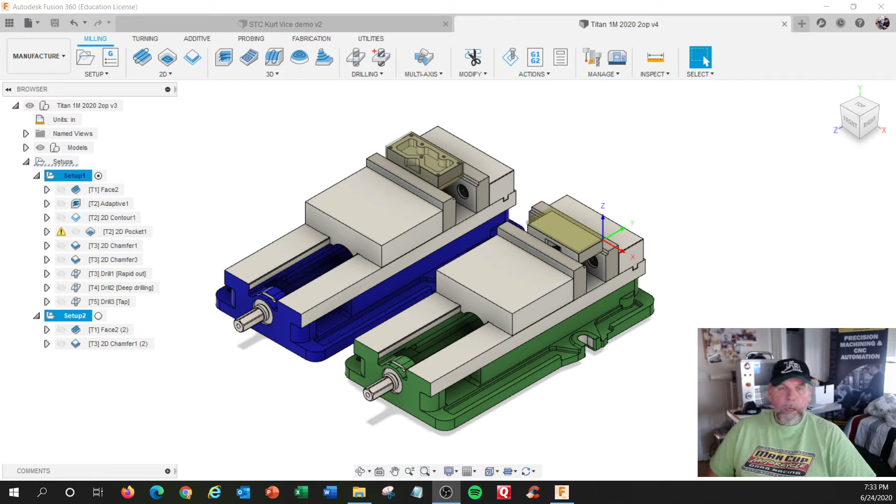So in this setup here, we got 2 vices. I'm going to just turn off here. I got a lot of stuff going on here. Models. Turn off that body on that side. Oh, it's 2 of them.

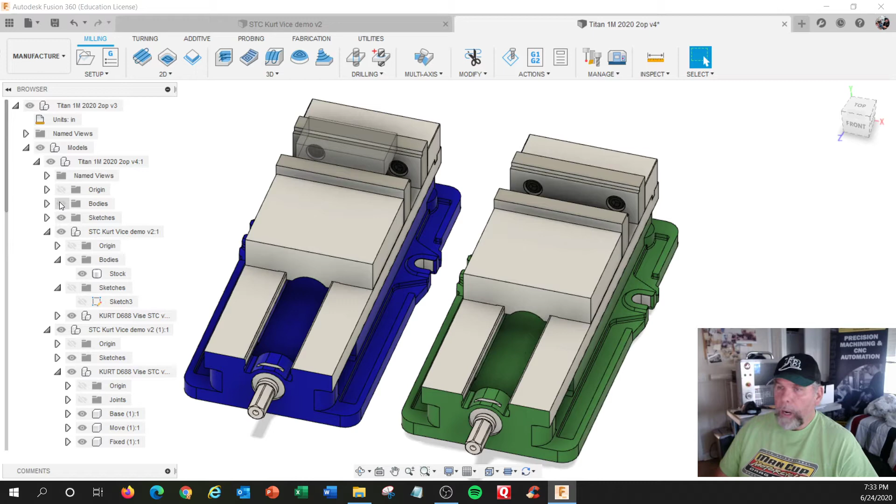All right, on this side we have raw material in our step jaws. These are like soft jaws. We make them out of cold rolled 1018 steel or 6061 aluminum. We pre-machine all these holes. So this is like a good shop project. We buy 1x2 bar. We cut off the length, and we cut this notch in here 200 wide by 200 deep. Works for a lot of stuff.

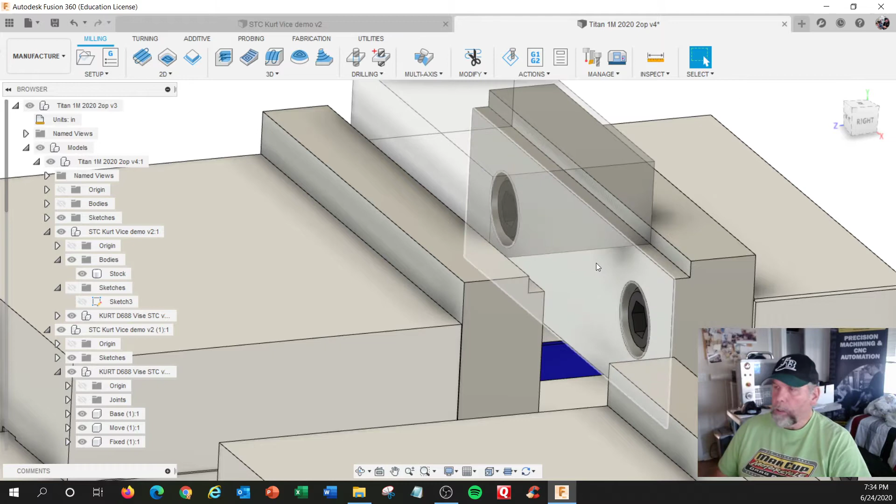You could probably get away with 150 deep or 100 if you try, unless you get those new Mitee-Bite jaws. Okay, so raw material, and we're going to put it in the jaws. We're going to be able to machine all the way around here, and in this case I didn't get time to build one, but we'll put a stop, or you cut a notch in your soft jaw for your location for production machining.

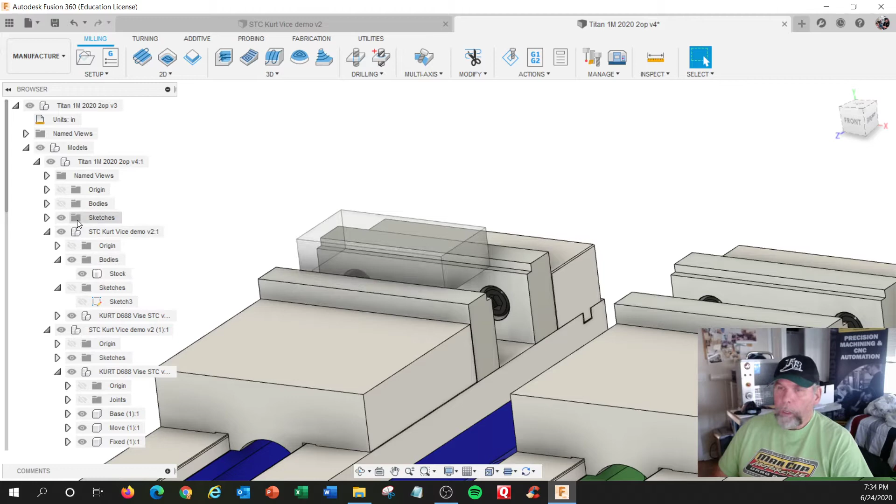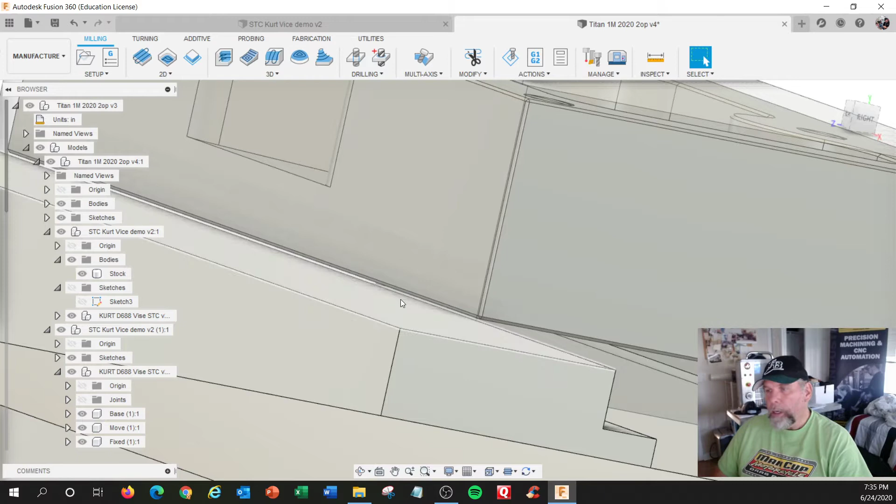Let's turn the model back on. Okay, so inside here is the model, and it's 1-inch material sitting down the 2-inch jaw, and I think I have the stock shifted correctly. I might be a little deep here, but it should clear without hitting the jaw. I might be a little bit off on that, but we'll see. On this side is operation 2, and we'll have extra material, which is on the bottom here on this side.

I'm going to work a little bit better on the simulation, but let me re-zero this. Oh, let me play with my new mouse. Okay. Bring it in a little bit closer.

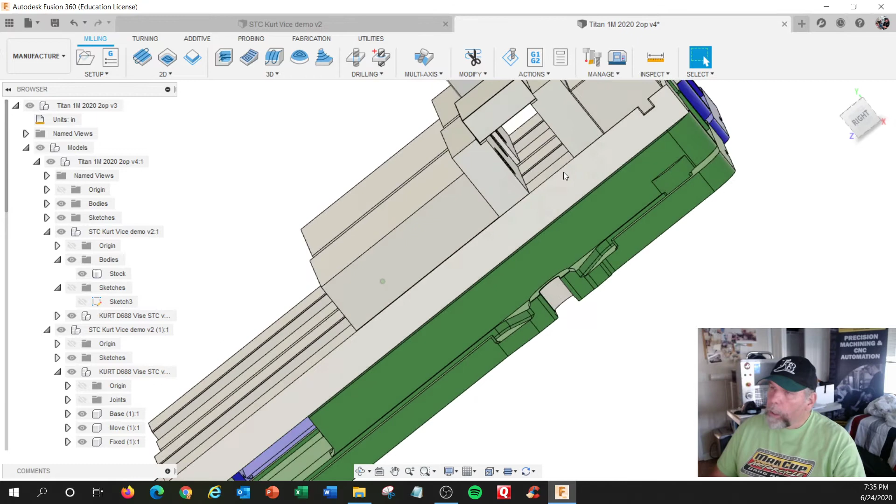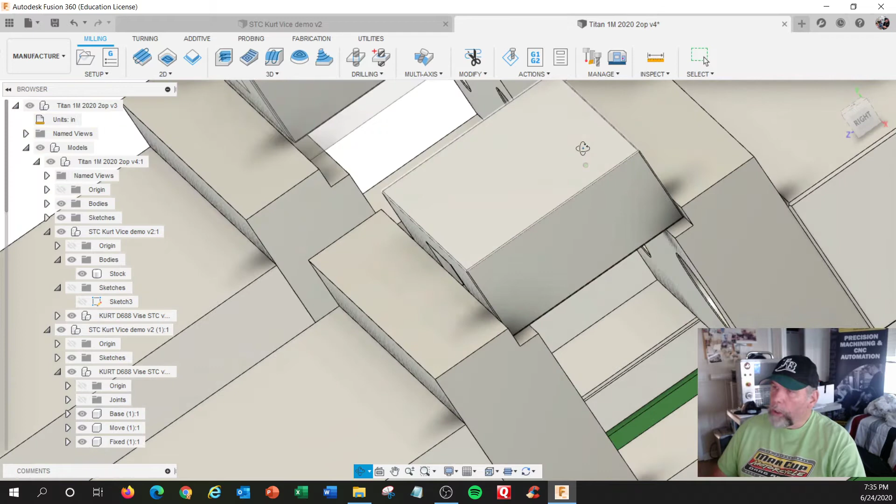So we're going to sit on the finished surface underneath there with the notch towards us, because this is the datum. We're flipping it over so the datum is on this side. So this datum and this datum will align with that. And the goal is we're trying to cut off all the extra material from this side, which will be facing up. And let me see if I can shrink some of these things up.

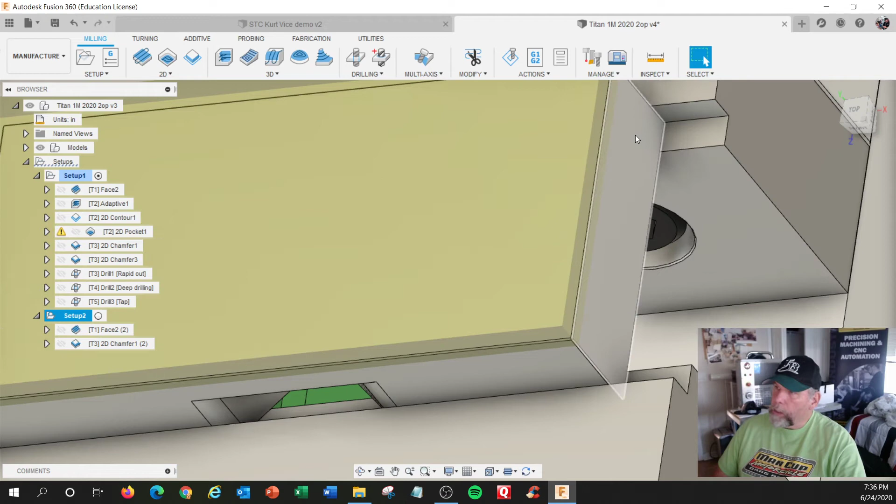So setup 2 would have this, some people call it the hat. That's like the remaining material. And we'll have to put a work stop against this side here. So kind of aligning with the Titan setup procedure to be always aligned to the model. So on this side X, Y, and Z are aligned to the model. Only when you're doing this setup, let me re-zero this.

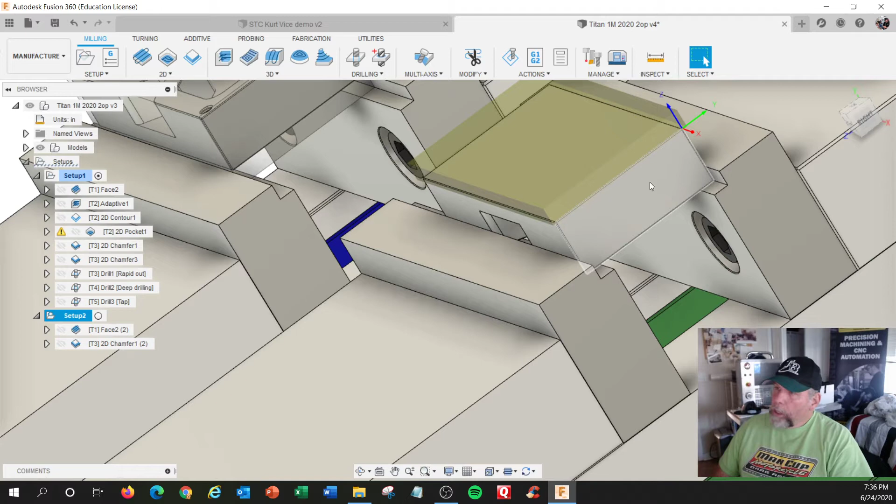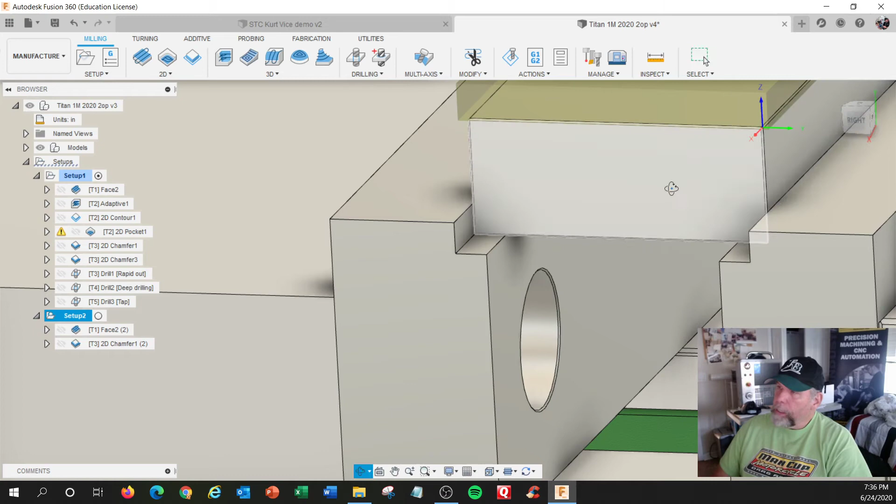You're gonna edge finder probe this side, edge finder probe that side, but you can't really edge find with this chunk of extra material up here. It's overhanging. So we substitute a 1-2-3 block. And then we edge finder probe this side and this side. And then you can either set your tools off of this surface here or the top of the 1-2-3 block, which is about up here somewhere, and then shift it down.

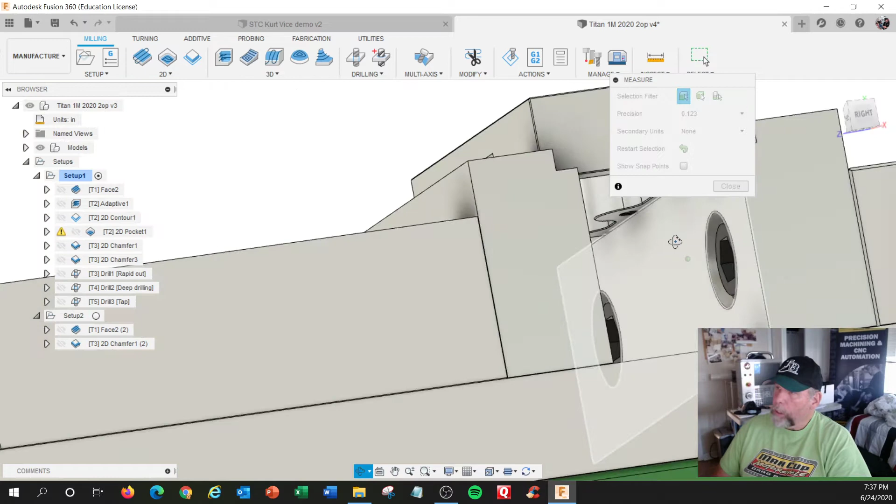If you're using a precision block, and the dimension on this is 750, if I inspect this right now, measure this surface from here to here, and it says right there 750 tall. That's what we're trying to create. So if you're doing a setup like that and you're setting this as your Z0, your setup is Z0, right? You got to chop your way down here.

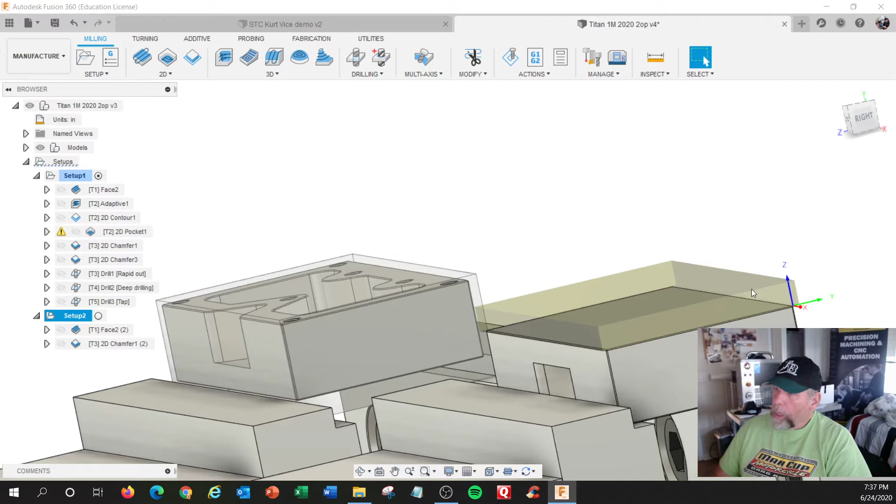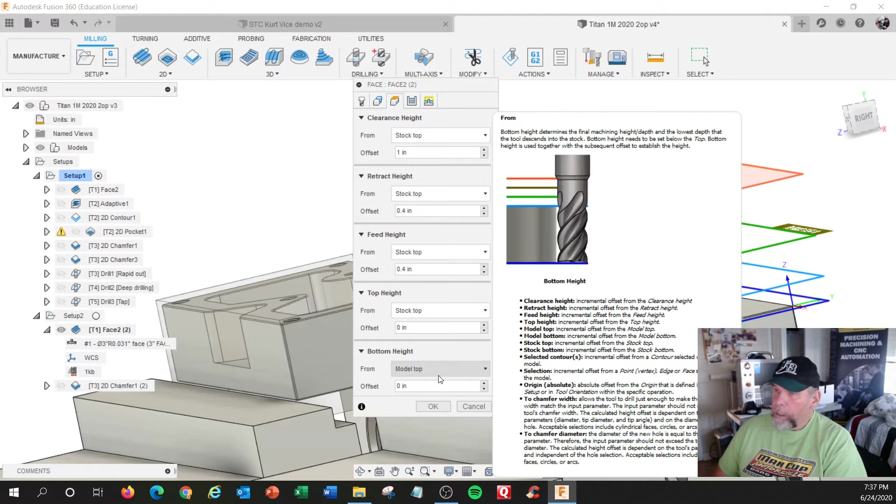So on this side, instead of model top, you go and edit this. Sometimes I use model top and 1 inch, but I would be going stock top. Stock, stock, stock, and the finish line is model top. So you got to know where your stock is, or it's not going to recognize it for roughing.

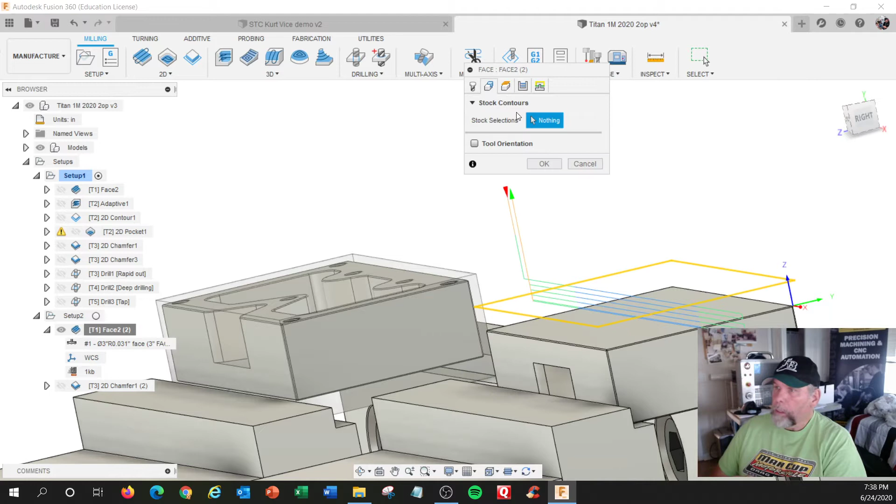And let me go and edit this here. I'm going to do multiple cuts. So we got geometry, heights, and I've decided to just take a nice round number, 50 thousandths cuts. And we're going both ways, starting from left to right or right to left. You can play around with this number. And I might play around with the chip thinning later, but this is pretty much straightforward.

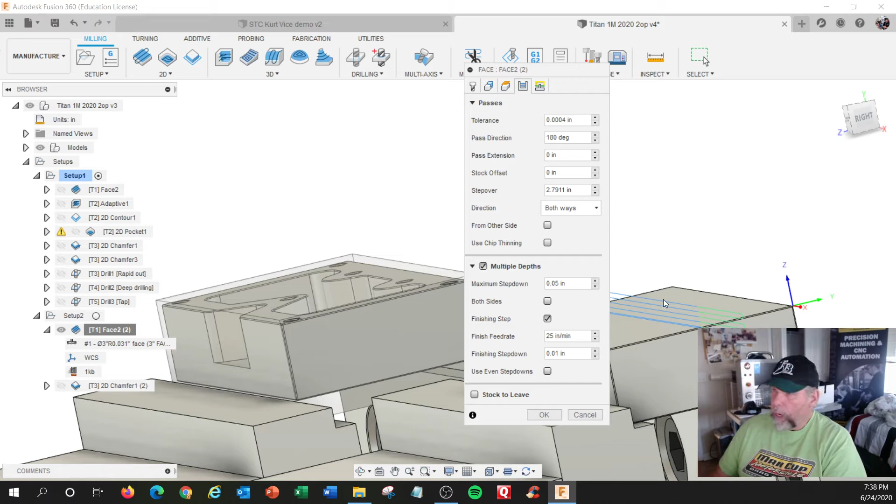And I'm going to do a finishing step that matches the finishing step on this side, so I get exact same finishes on feed rate. And I'm just going to skim 10 thou off, because you could be more aggressive on the rough down, and then when you get to the last cut, we're going to go only 10 thou. We're not going to leave any stock. And I always turn on extend before retract. So if it's not going all the way, you extend before retract, or you'll have to play with some of these numbers. Okay.

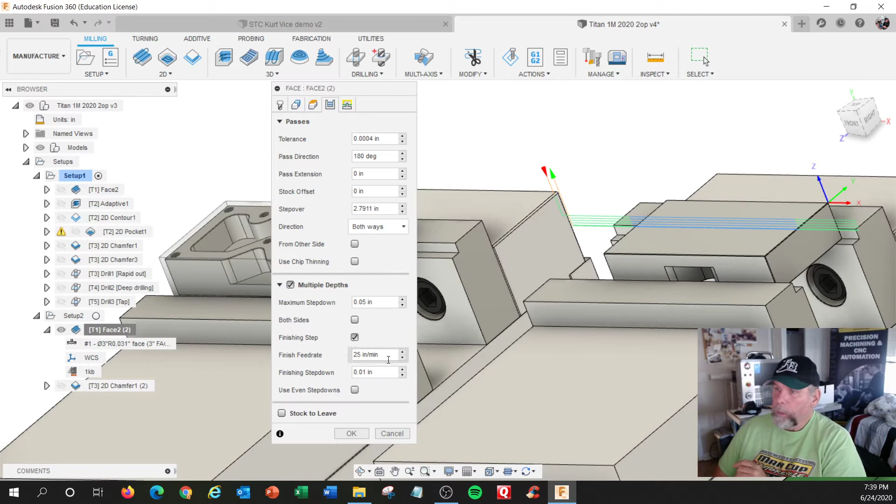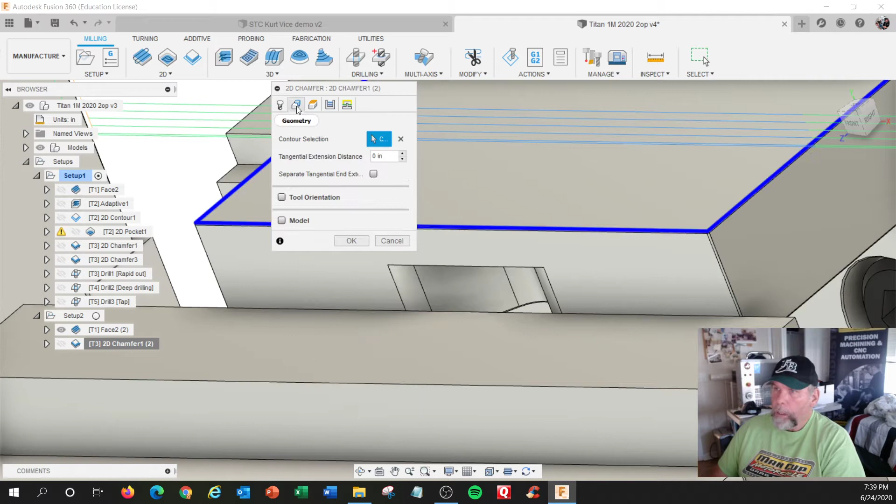And then we duplicated the chamfering move from this side and put it down here. So it's tool 1 and tool 3. And we already have all the data, only we need to reassign it to this new geometry, because the geometry is now on this one here. And we use this edge here with the chamfering tools we use.

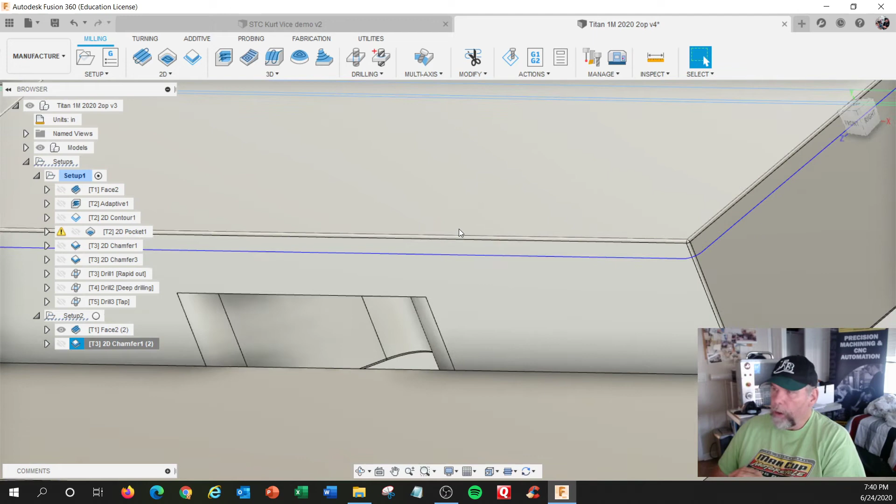We set the chamfer width to 0 so that it aligns with the chamfer. If we go beyond that, it adds a little bit more. If you're using chamfer with no model chamfer, then you can add a number. That seems to work good for us. All right.

All right, let's simulate, and hopefully we don't crash into stuff. So you can go in here. We're going to do both jobs at the same time. So let's go in here. We got to check our setup. Setup 1. Oh, why am I? Hey, escape. I was doing that before.

Edit. So in your post process, you want to take care of all 3 tabs. You want to name your program number and name what the job is. STC 2op. Oops. 2op. Okay. Use work coordinate 1. Do not use 0, even though 0 and 1 do the same thing. If you want to get both operations, this one is going to be G54. Okay, that one is done.

Setup number 2, vice number 2. Now we had this already pre-programmed to do separately, so we could leave this in here, and we'll see what it does. But this will be assigned to be G55 or work offset 2. So this is all set to go. So you have to highlight both of these. And if you want to just shut off the toolpath, we'll just watch simulation only.

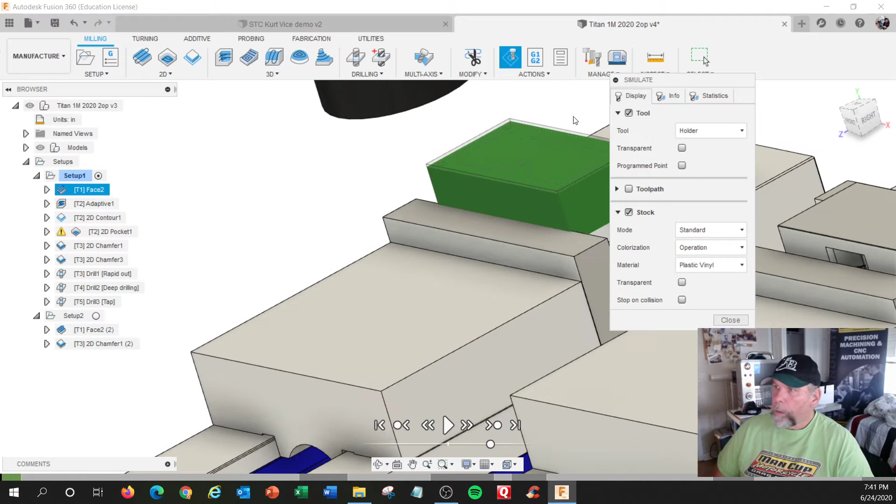Oh, let me turn this one on. I think I can get them both. Shift and this one up here and simulate. All right, there we go. Move this out of the way and press play. All right. Goes around. Cutting that side. Now this is what we're really looking at, and your concern is always, am I high enough that I don't hit the jaw?

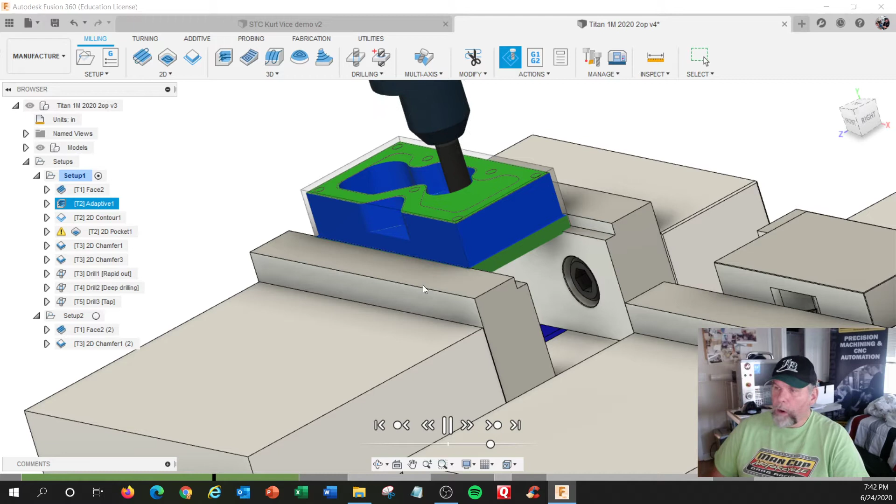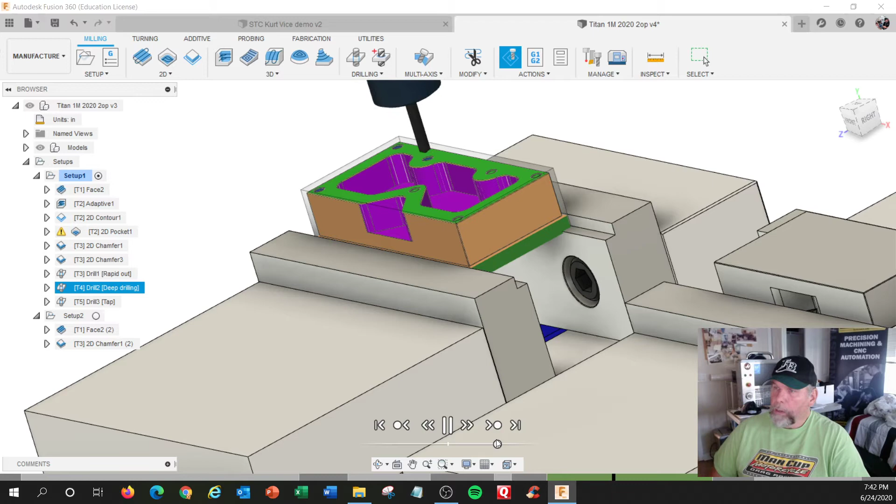So if you're using parallels, you have to make sure you get the correct parallel selection. If your part is too deep, you're going to run into the jaw. And if it's too shallow, it may not hold. It might pull out of there. All right, this is our adaptive roughing. We're contouring, we're finishing the floor, chamfering, spot drilling, we've seen this a million times. Do some tapping.

And then we go to this side. You just hit pause for a second. Unfortunately, I can't get the stock to appear on that side. I'll have to work on that. All right, chopping around and then chamfer. So to be more efficient, it wouldn't be a ton more efficient, but the face mill is already out, and we could just go face mill, face mill. So if you have jobs that you want to make slightly more efficient,

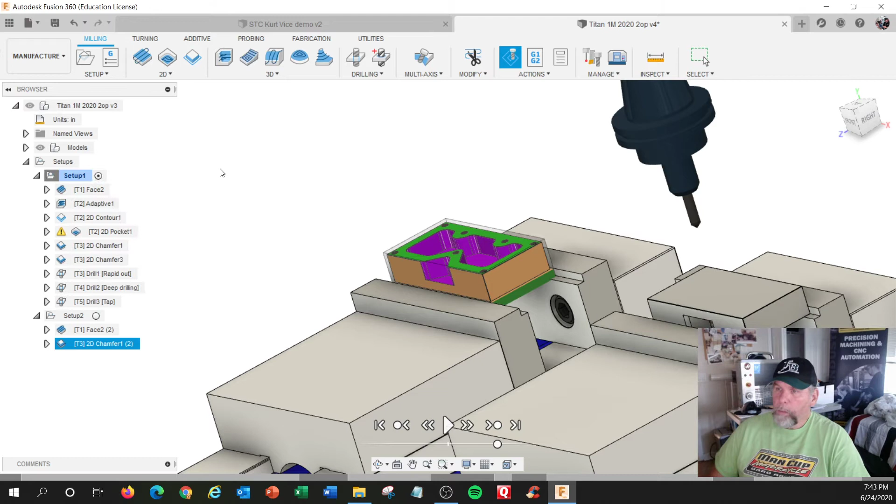when you do the post, you're going to click on this one, click on that one, and hit post process. It says multiple setups. Yep, we do 2 setups. Right here, make sure you pick my posts. Our posts are in the cloud. Right up here, setup, use cloud post. We only have a couple here.

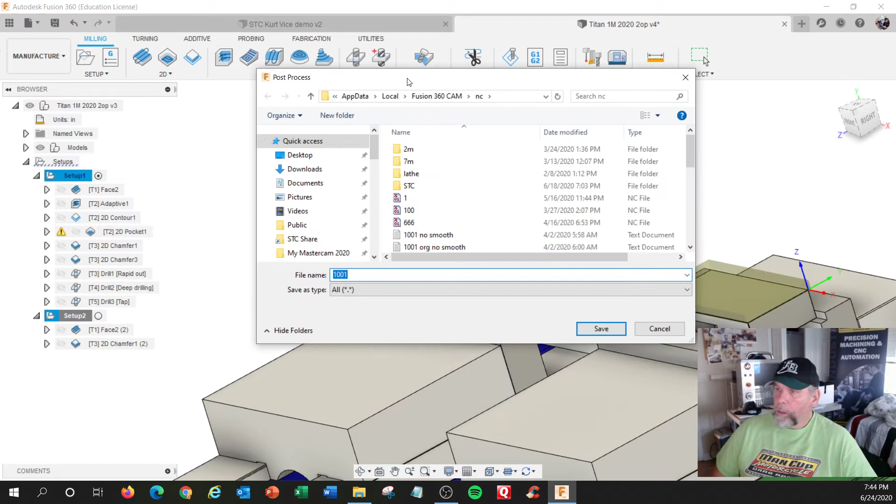We have a demo here for horizontal. We have a 4th axis, next gen control, the older classic controls, and our ST10 lathe. So we're using the classic control. Programs already numbered, comments already done, and we're going to reorder to minimize tool changes. And hit post. And we're going to create a file. And if you know anything about G-code,

I'll bring this over here. Ooh, what the heck happened? Let's try that again. Post. Multiple. We do take the reorder off and hit post. Save. Already exists.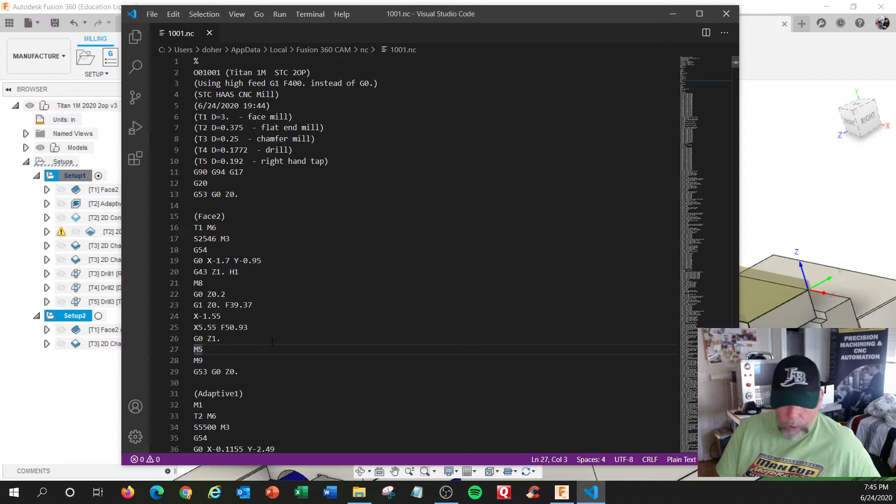Alright, so there's our code here. We modified it so we have a school name, a timestamp, and a simpler tool list here with just tool numbers, size, and description. And the operation. So operation 1, 2, and I'm going to hit Control End. That'll get you to the end of the file. And the last one, this is G55 for the chamfer, and this is G55 for the face mill on the right side.

So in this case, it's going right there. There's your cut moves right there. We're at Z.210, Z.160, Z.111, Z.060, and then 10 thou. And on this one, right here it goes to Z0, and then the feed rate slows down right there to 25. And we moved our coolant so it shuts off before it goes home to the G53.

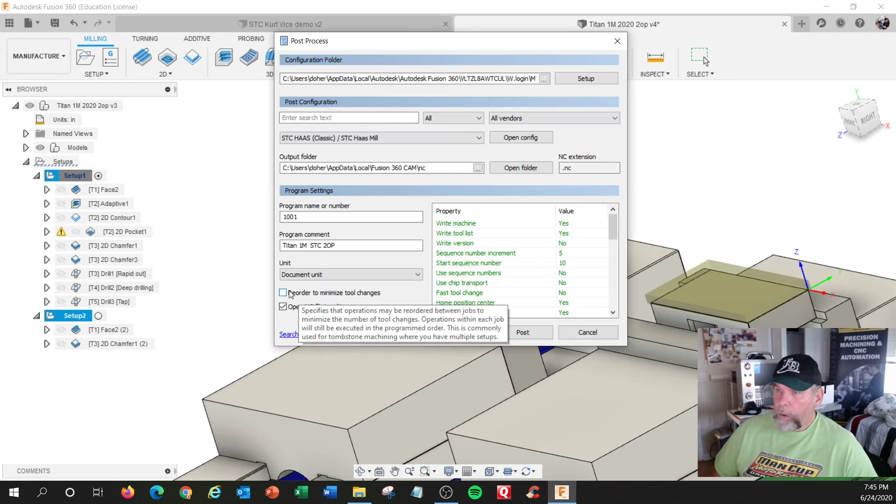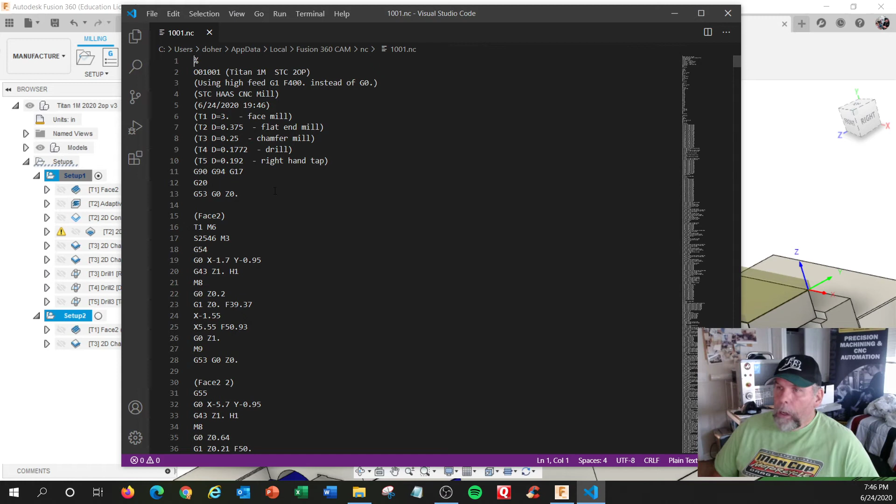So let's see if we can post with reordering tools. All right, hit post, save, yes, and okay. We can't demo it, but right here, tool 1, G54, does its thing, shuts the coolant off, goes home, and then switches work coordinates and goes to this work coordinate. It's the same positioning moves, but a different coordinate from home. That's why they call it work offset. How do you get to work?

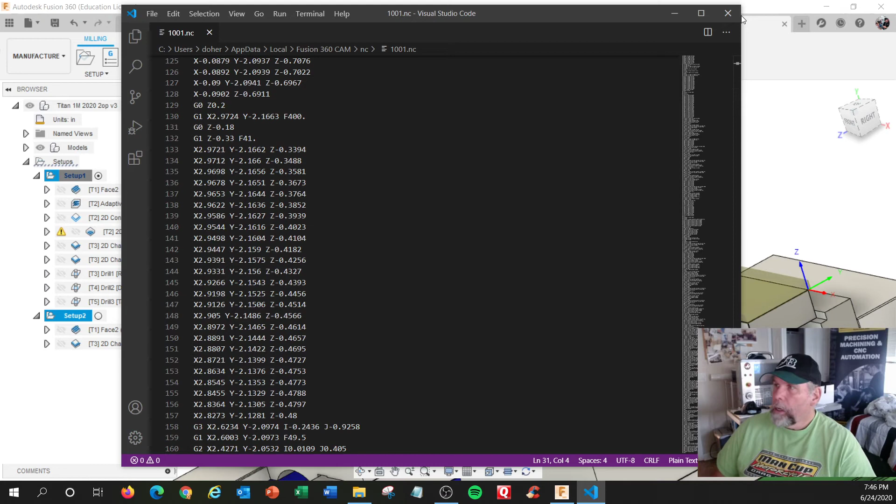And this is going to cut the other side, so you're more efficient, less tool changes. And then when the chamfer mill's out, it's going to go chamfer the other side, which makes the other one done. So as this job goes along, you're going to put in raw material on this side, and you're going to take the finished part from this side and load it on this side. Shut both vices, cycle start, and it's going to make 2 parts at once.

Now we can get really deep into this and have like 4 vices or double vices. You can do 2 roughing ops, 2 finishing ops. You can just keep on adding on from there. But this is your typical 2 operation job right here.

And imagine the setup time if you had to make 50 of these and you only have one vice. If there's any mistakes, you might end up with 50 bad parts, and you won't know till you get to this side. So at least you get one complete part for your first article inspection, and if it's a go, then you just run them off.

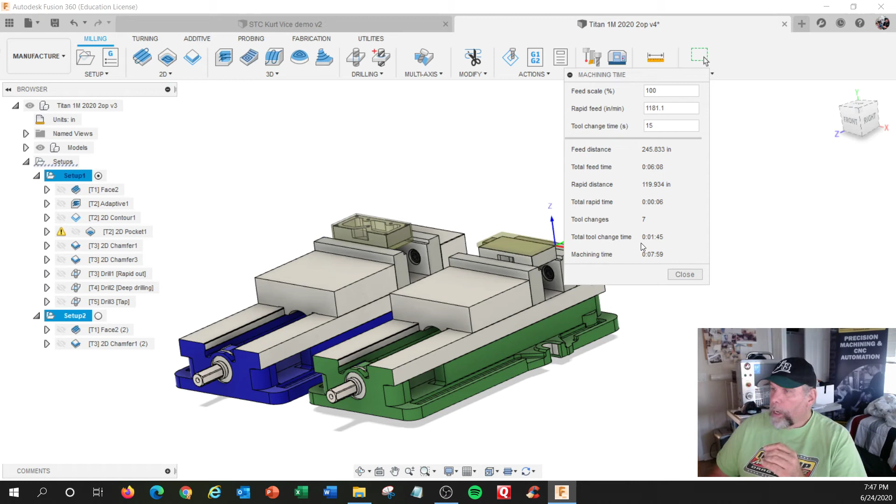And up here is machining time. So right here it's a little over 6 minute cycle time. It goes right here: tool change time, machining time, and you could build a lot of stuff into this so you can gain a little more time. So if you had double vices, that'd be like 12 minutes, or you get 8 parts an hour out of this. So okay, that's my quickie, my double vice simulation.

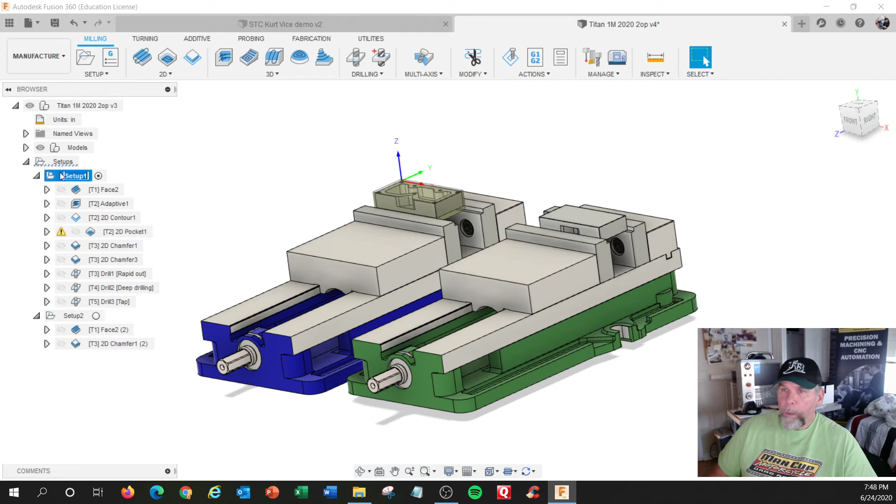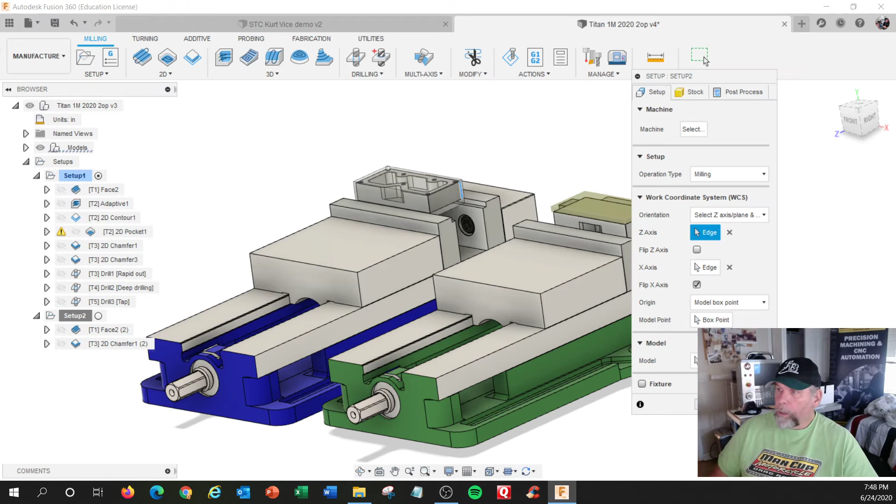And I feel like playing some more here. I don't think I had on my setup the fixture identified right here. So I'm going to identify this and this right there. All I want to know is where the fixture is for collision detection. On this side, I'm going to do the same thing. Oh, you picked all three. I don't want all three. Oh, wait a minute. Model is that one. That's correct. Fixture is this one, this one. Yeah, okay.

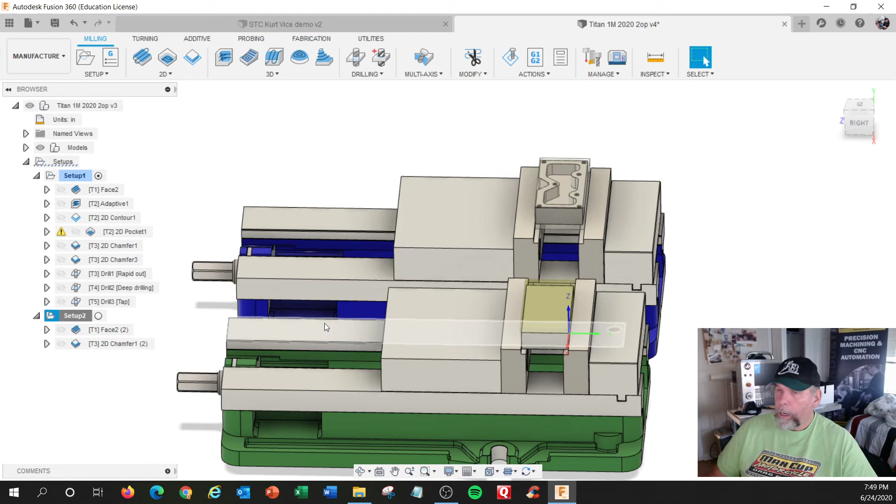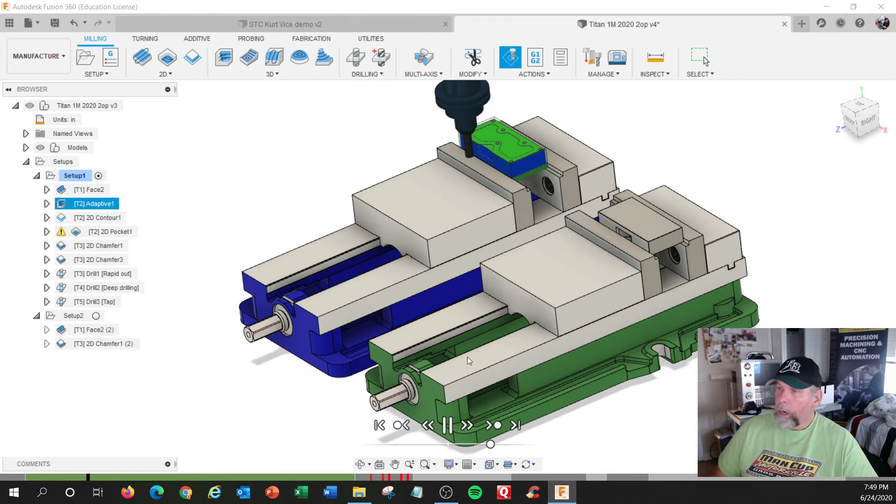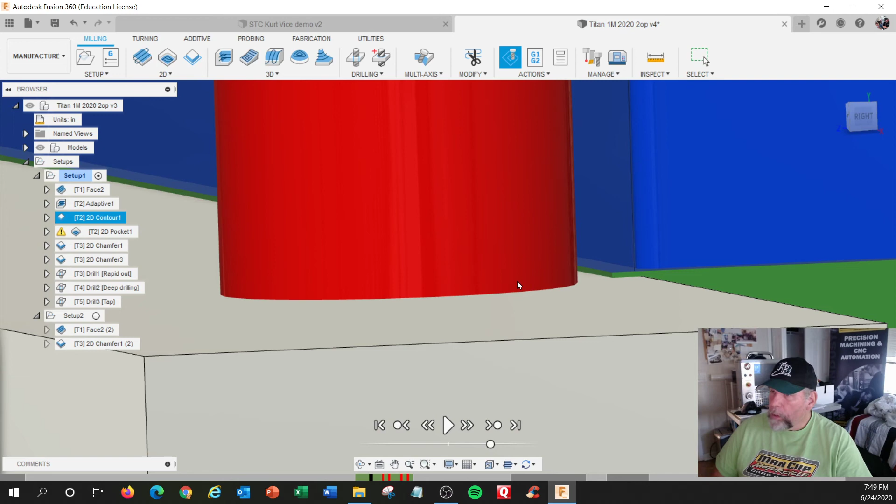So we go back to here, and let's just simulate one. Simulate. And you put here stop on collision, and if it hits something, it's going to turn red and actually stop. All right, pull this out of the way, zoom up a little bit, and hit play. All right, so it makes it. We're running close there, but it makes it. Let's go right there. Got a problem. Running a little bit too close. I see a little bit of a feather edge there, so let's go and look at this.

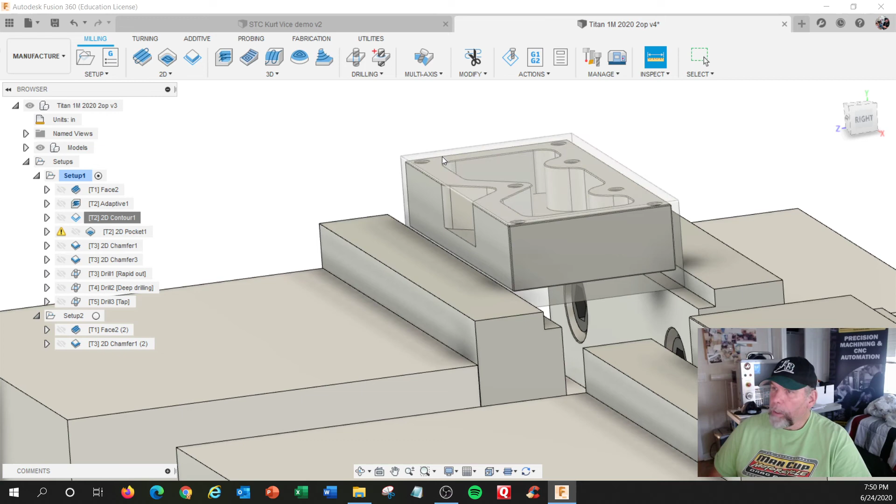All right, that was this contouring cut right here. Edit, heights. We use model bottom and 10 thousandths. Okay. Let's measure. If I took a caliper and measured from the top of the material down here, I need to have 760 thousandths of material. Let me see if I can measure virtually, from here to here. Nope, sorry, I'm measuring the wrong thing. So that's 800, so we have enough room material-wise. I would say our setup for our Z is in the wrong position. We're buried too deep in this thing.

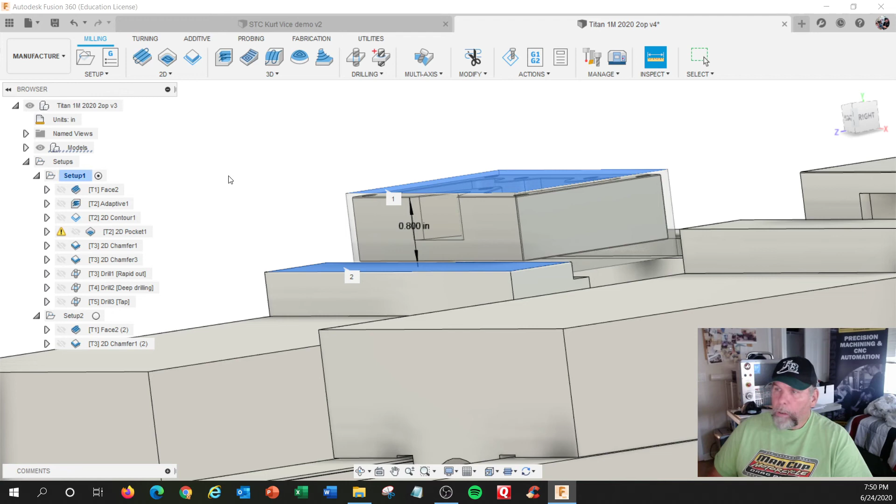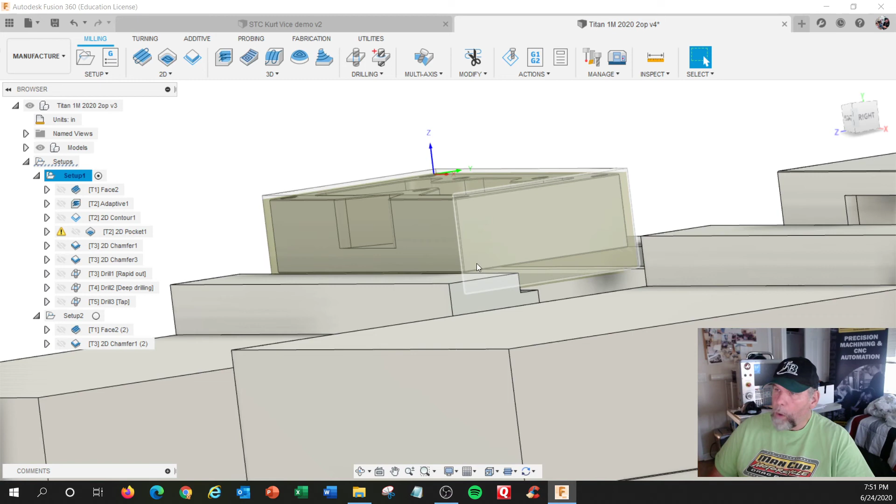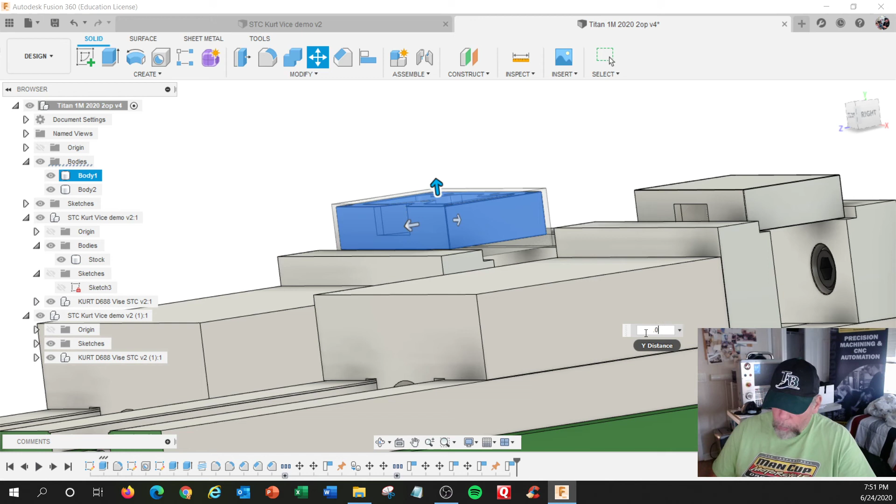So our Z0 is right there. So we need to raise the part, or shift the offset up a little bit. If you're in your work offset, probing the top, and you overshifted, you've actually made it so this whole model is deeper. Okay, let's see if I can fix this. I gotta go back in design. Getting pretty busy here. All right, body 1. I'm going to move it up, let's go 0.025, and hit OK. All right. Looks better, right? Looks like we're above there.

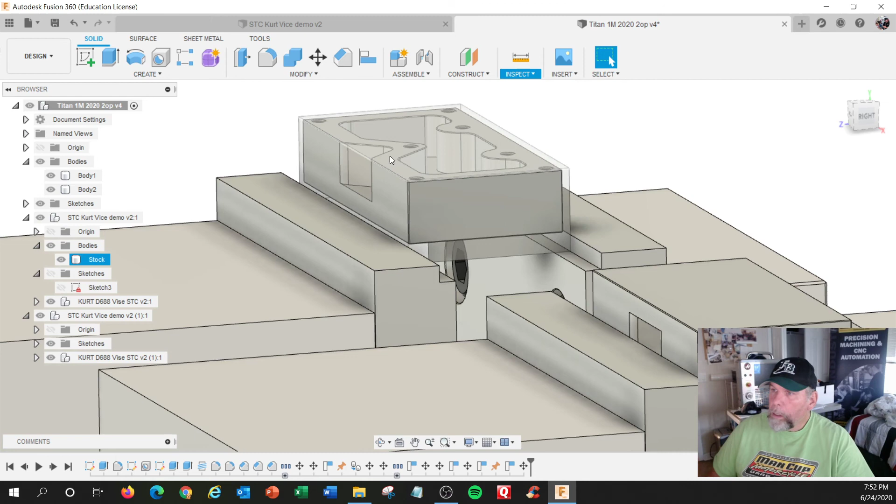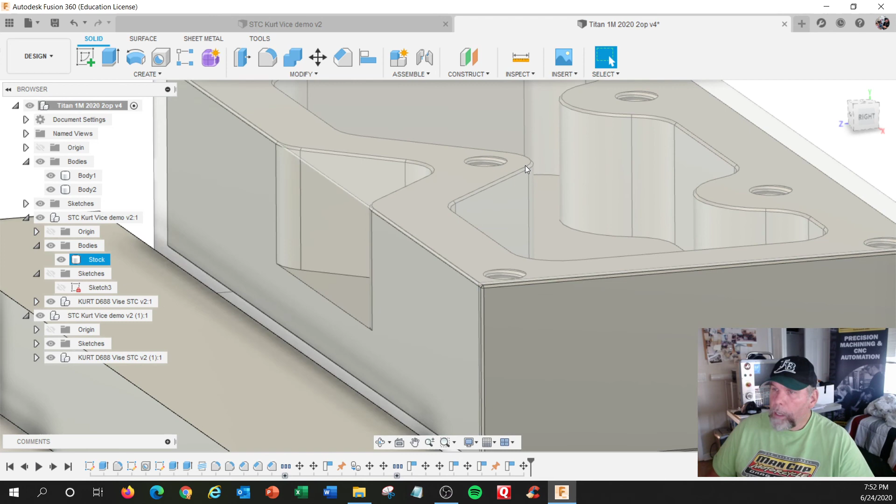So let's measure from here, top of this, to the top of the face. Let's see if I can actually click on that. Am I getting it? No, I don't think I am. Let's measure again, inspect, measure, and oh, wrong area. Escape, measure from top to there. 20 thousandths. That's kind of like what Titan says. So this should work out good.

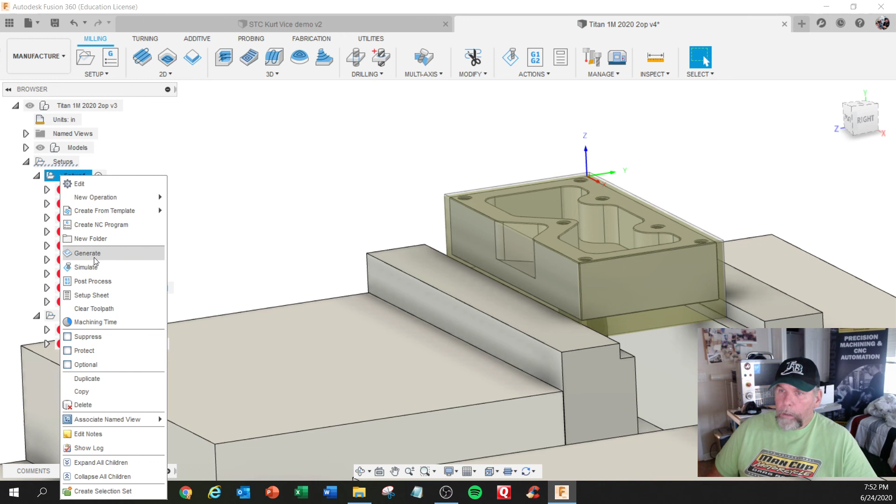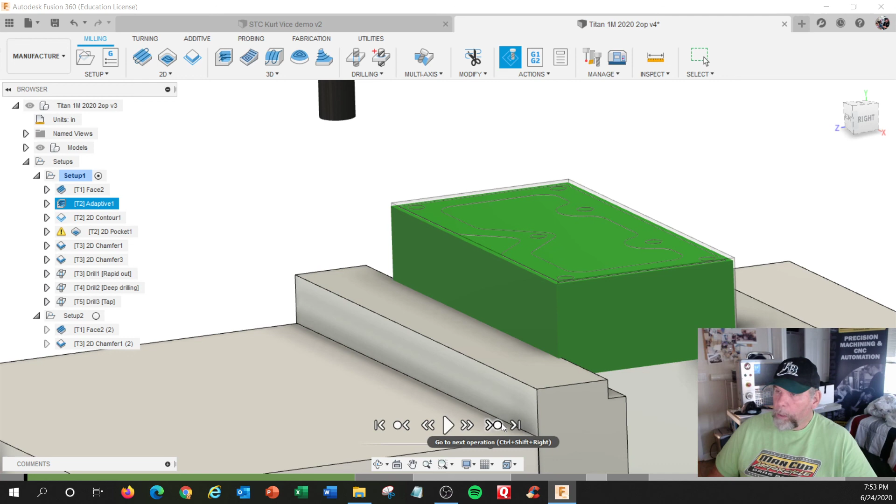Let's go back to manufacture. And okay, we got to regenerate all these operations again. All right, regenerate. We're still aligned to the model because that was our orientation. We just moved the model, right? And I'm going to reshift this one just to fix it. All right, let's do a simulate. If you want to jump ahead of operations, you just hit the next operation. So this will be the roughing operation, which we know cleared. And now we're going to hit play to do the contouring. This is where we had the crash. And now we're clear. We shifted our offset virtually. All right, everything should be fine now.

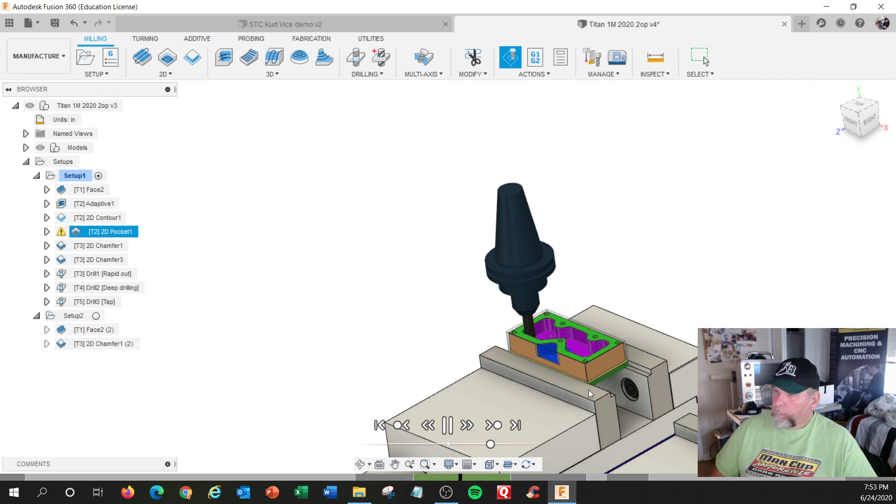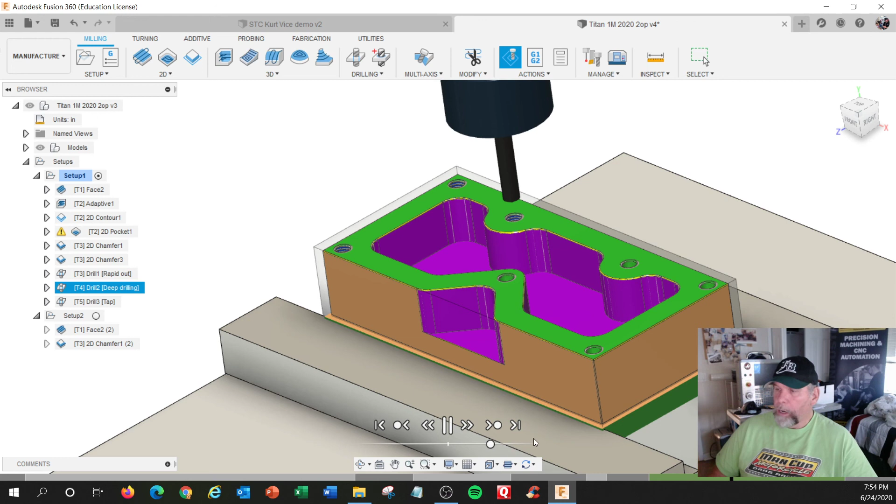Yeah, so you got to be thinking about where the part is and how your setup's going to work so you can machine it without having to kill your tools or your jaws. Now, if you use soft jaws and you just babied into that, it would probably be fine. Part would hold in, you'd have a little skim mark on there, and it probably would still be usable. But if it ends up doing a big railroad track down here, then you probably have to remachine the top and recut the jaw a little bit deeper, because the good thing about the soft jaws is they're reusable.